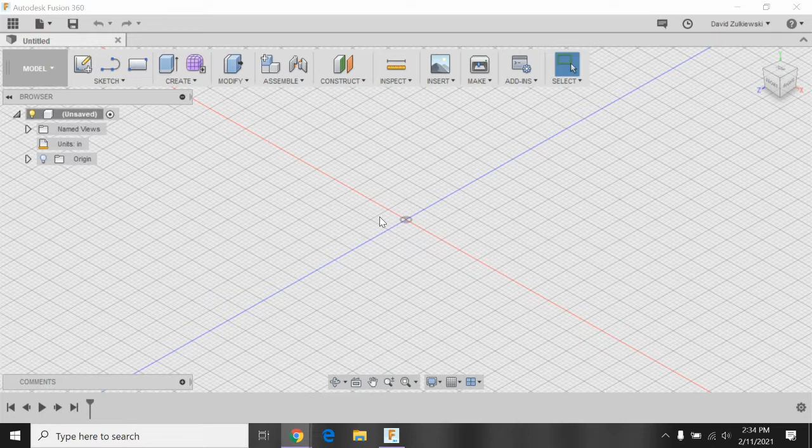We'll remember that. Okay, and we're just going to draw a simple rectangle that matches up with the dimensions. And so in order to create a sketch, I'll go up here to plus sketch. And we have 3 options, right? I'm going to be looking down at my part, so I'll select the blue-red plane or the top work plane here. I have my 0, 0 in the middle. We'd like to try to get our drawing to be as close to 0, 0 as possible.

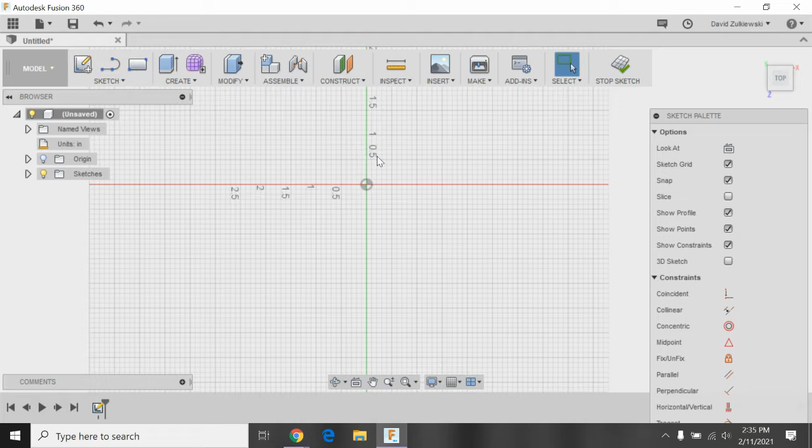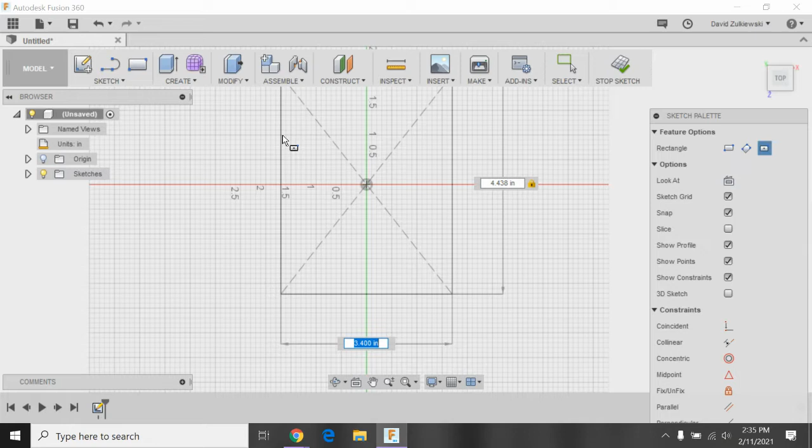So what I'm going to do is go to sketch, rectangle, and a center rectangle. I start to draw my part, and my drawing is 7.125. Actually, my height is 4.438. My tab, my length of my part is 7.125. All right, I'll zoom out here so I can see a little bit better.

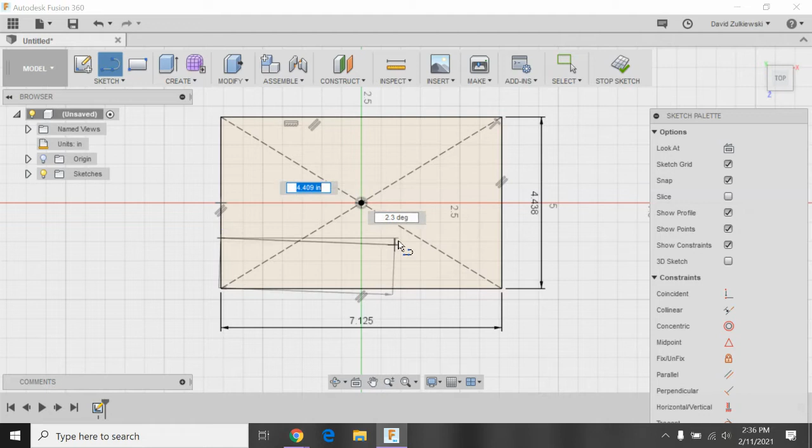And then I have the little L shape that I need to lop out this little rectangle here at the bottom. So I'll draw that shape. And I'm just going to be careful so I don't click on things like the midpoint or on anything along this dashed line. So I'll come out here somewhere, click. As I go across again, I'm going to try to not click on the green line or this diagonal line. I'll stay just a little bit away or a little bit past it, somewhere in there. And then I'll just go straight down. All right, so I have this little notch that I'm going to cut out.

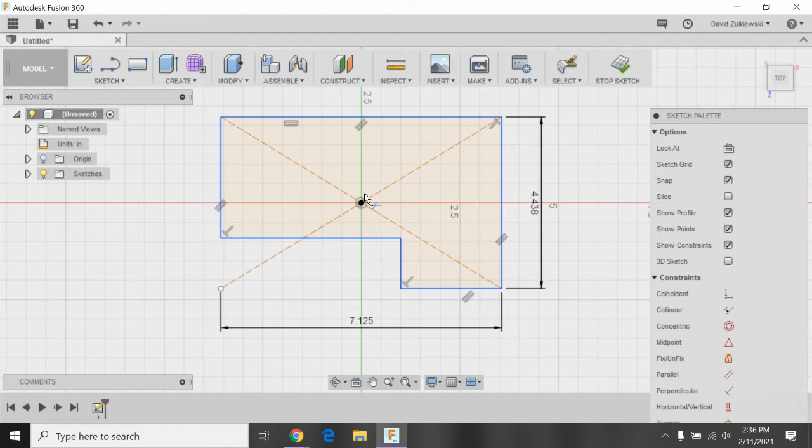And in order to get rid of these 2 lines here, I'm going to go up to sketch and go down to trim. And I'll hover over the line I want to get rid of and the second line I want to get rid of. Now this doesn't look exactly like my part, so I need to dimension this a little bit. And I'll go to sketch, sketch dimension. And we'll just look at our part and we'll see what dimensions we can use. And I see that they give me this dimension here, and it is 2.25.

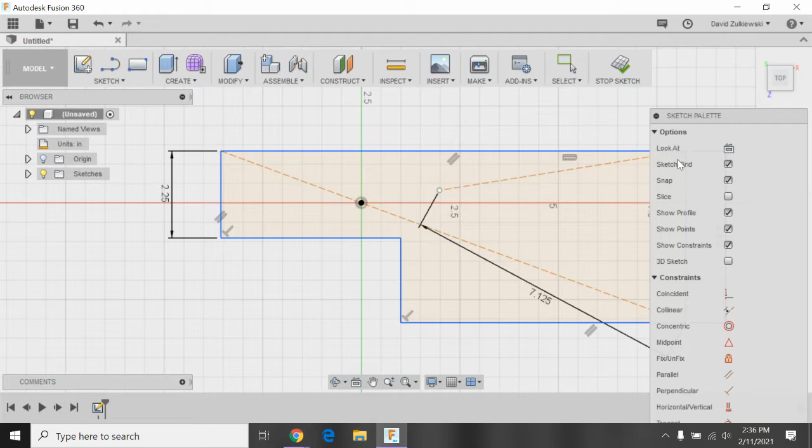All right, now that threw my drawing all over the place. Okay, so let's zoom out here, try to take a look at this. It got a little bit crazy because there's this dimension here based off this white dot. So we'll undo that. Let's try to take a look. That 7.125, see how it went to this lower point here?

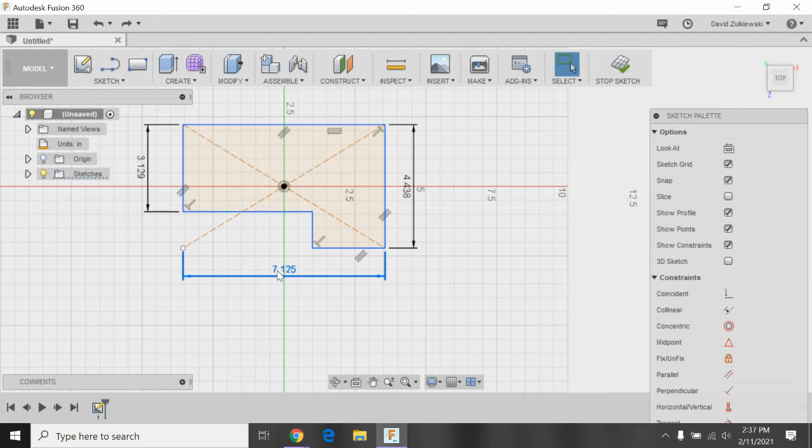Well, what I'm going to want to do is I'm going to delete that dimension for a second. And I'll go up here, I'll dimension this line instead. So sketch dimension. And I'll make that 7.125. Looks good. Hit enter. And now I should be able to go and double click on this and type in 2.25. There we go. So sometimes, depending on where our dimensions start and stop at, our drawing might get all crazy. So just got to be careful there because we had that reference point on here.

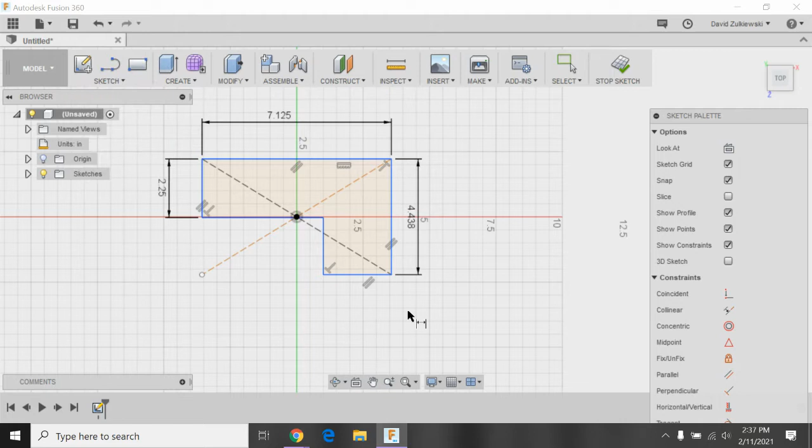The other dimension I have is this bottom piece here. I drag it down, and this is also 2.25. Okay, looks pretty good. Now we have 3 holes in our part, and there's actually 3 different ways to create a hole. So I'm going to do all 3 of those today for you, and you can pick the one that works best and go from there.

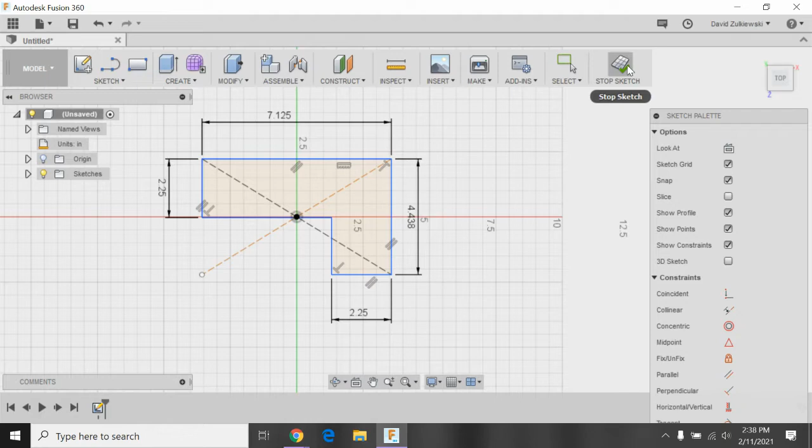All right, so let's stop sketch, and I'll hit the house button, and there's my 2-dimensional part. Well, we want to make this 3-dimensional, and the book did not provide us with a thickness, so we'll make it 1 inch thick. So let's go ahead and create. Click on my shape, and again, I can grab the arrow and drag up. I can type my number right here in this box, or there's also a dimension box over here. So ours is 1.00. Hit enter.

Now again, 3 good ways to add a hole. The first one is to put the hole in the original sketch. So in order to go back to that original sketch, go down to the bottom of your screen here. You see all these fast forward, rewind, and play buttons. And right next to that are the 2 things we've done. We created a sketch and we extruded. So I'll go to the sketch and I'll right click on the sketch. And it's not showing up as edit.

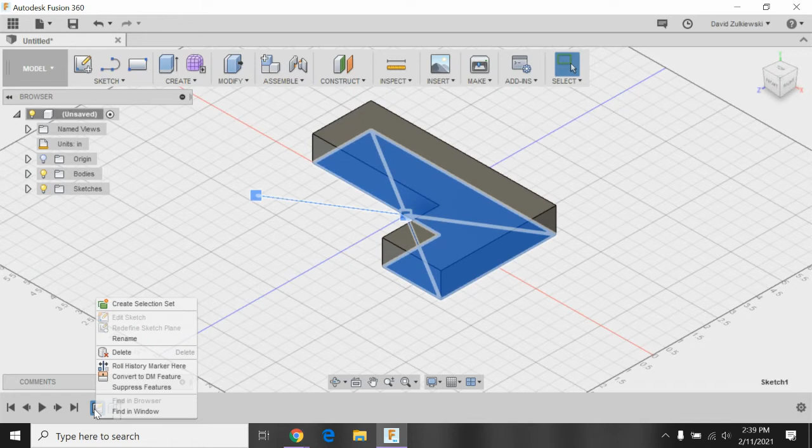So let's try that one more time. Hit the escape button. And there we go. Now there's edit sketch, and it takes me back to the original sketch. So I'll go ahead and put in one of the holes right now. So sketch, and it's a hole, so circle. I like center diameter circle, but there are several options.

So center diameter. Again, when I go to draw this, I just want to be careful. Don't draw it on the diagonal because we're going to want to put some dimensions in here. So I'll just come over here a little bit. Notice that dashed blue line? That's the midpoint. If I start at the top and work my way down, it actually snaps to the midpoint. If you don't like that, you might want to hover up just a little bit. Well, don't want that circle.

Let's try again. Sketch, circle, and just come out over here somewhere, maybe not touching that dashed blue or that dashed black line. And I'll just draw a little hole here right now. Now, how big is the hole? It's 0.625 diameter. And it does say on the computer here, specified diameter, so that's good, 0.625. And I'll hit enter. Kind of hard to see my dimension, so I'll grab the dimension and I can drag it up out of the way so I can see it.

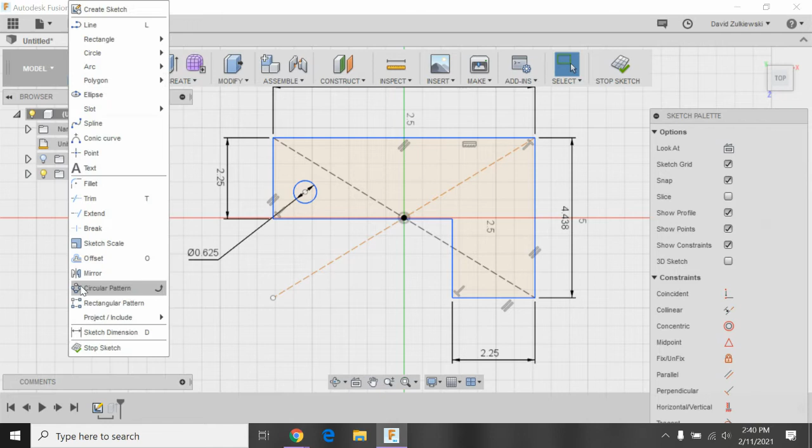Now, that's not where we want our circle to be placed. There's actually a couple other dimensions here that we need to use to place it. We need to locate our hole top to bottom and left to right. So I'll go up here to sketch, dimension. And the first thing I want to do is go from the top to the center of the circle. And you see we have a dimension here. The computer tells me it's 1.50217, but the book tells me it's 1.125. Okay, I'm going to enter. And that looks pretty good.

Now I also need to locate it left to right. If I look in my book, I'd really like to just go from this left edge to the center point, but the book doesn't give me that number. I'd have to do a little bit of math. So let's go from this far side to this center point and go up. Now I look at my book, and my book also doesn't give me one dimension to use here. It gives me two dimensions.

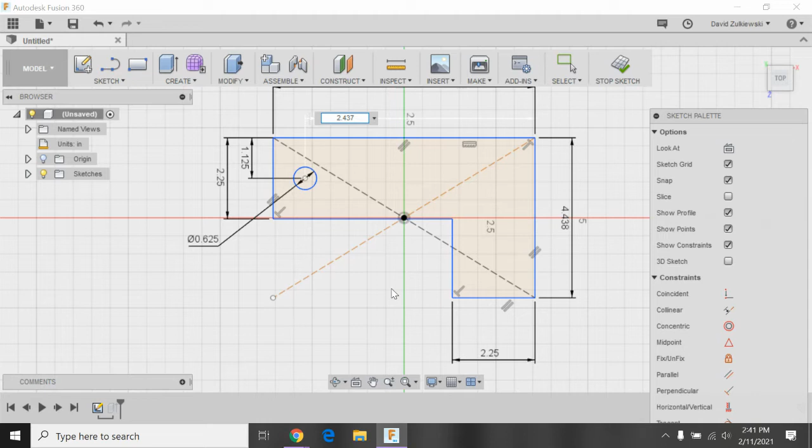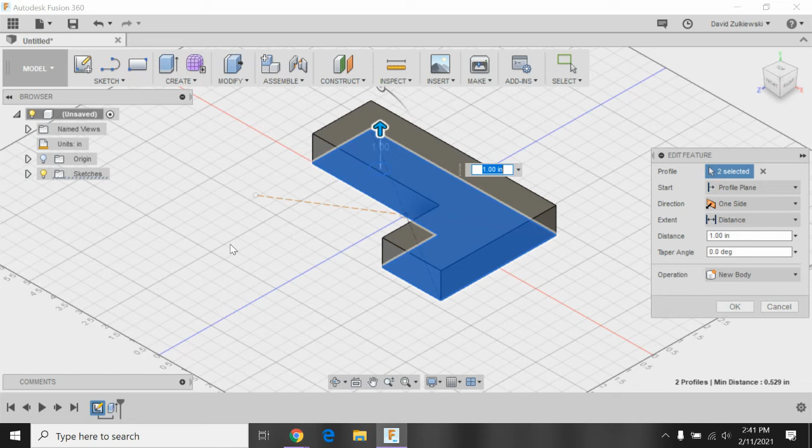So I could go to extrude down here in the bottom left, right click on the extrude. Again, I needed to get it highlighted, so say escape. Edit feature. And now I see the hole is there. If I click the hole once, notice that there's a little red circle around it. Now when I say okay, our hole is there, right? And I can grab the little block up here in the upper right-hand corner. I can see that there is definitely a hole there all the way through.

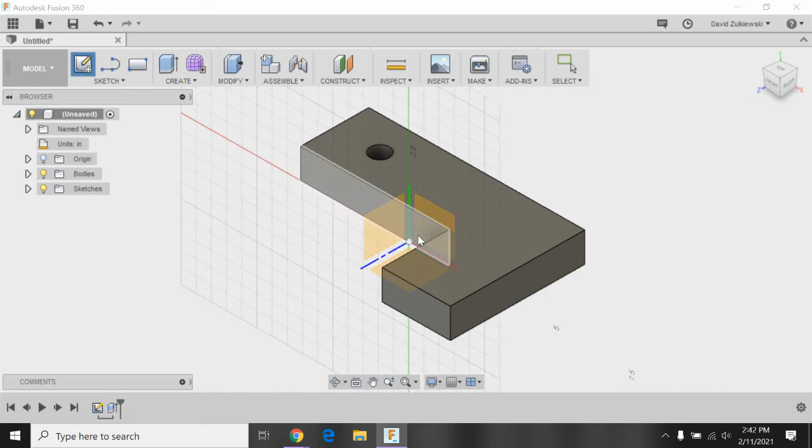All right, so that's method one. Maybe you like that, maybe you don't. Let's take a look at method two now. I have my part sitting here, and I can go over here to sketch, and I want to identify where to put the sketch. I could pick those orange work planes, but why not just select the top of this part? When I select the top of this part, it puts me into a sketch. Look up here in the upper right-hand corner, it says stop sketch. So I'm inside a sketch right now.

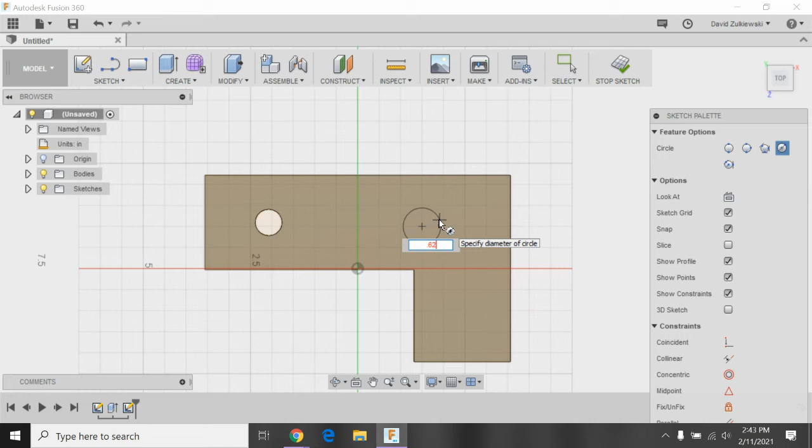I'll just go to sketch, circle, center diameter circle. I like that one the best. And I'll go over here and place another circle. How big's my diameter? Well, the book says all three circles are 0.625. And actually, hole would be the correct terminology, right? Again, I can't see the dimension real well, so I'll drag this up. And again, we need to locate this up and down and left to right.

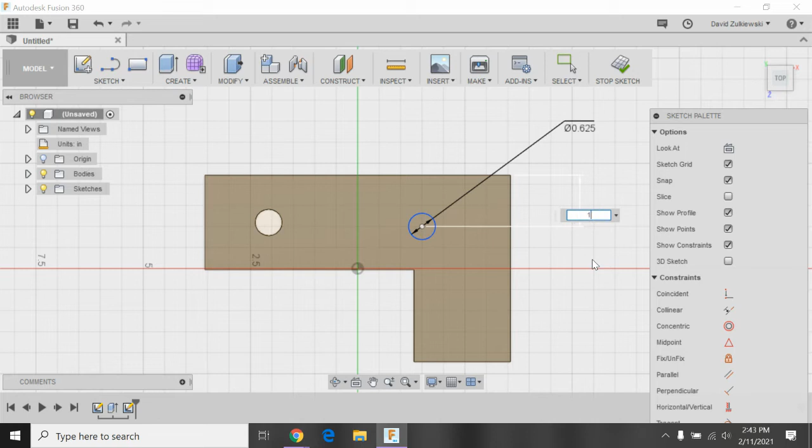So sketch dimension, from the top of the part to the center of the circle is 1.125. And then from the right edge to the center, I go up, and our example here says 2.437.

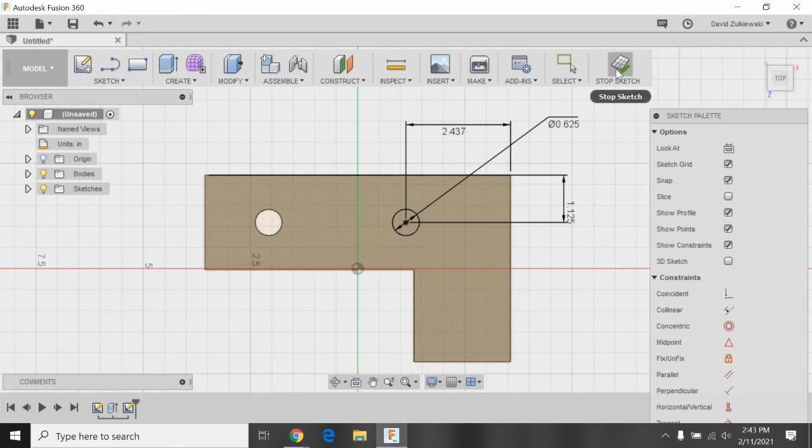Okay? And that's all I need for this sketch. So I can say stop sketch up here in the upper right-hand corner, stop sketch. Now the hole is sitting there, or actually now it's just a circle. Right now it is a circle, and we want to turn that into a hole.

So let's go up here to create. And again, different versions of Fusion, yours might look a little bit different, but just go find the extrude icon. Just hover over the icons till you find the one that works. Create. Click on that circle, and the arrow's pointing up. Well, do we want to go up? No, I want to make a hole that goes down.

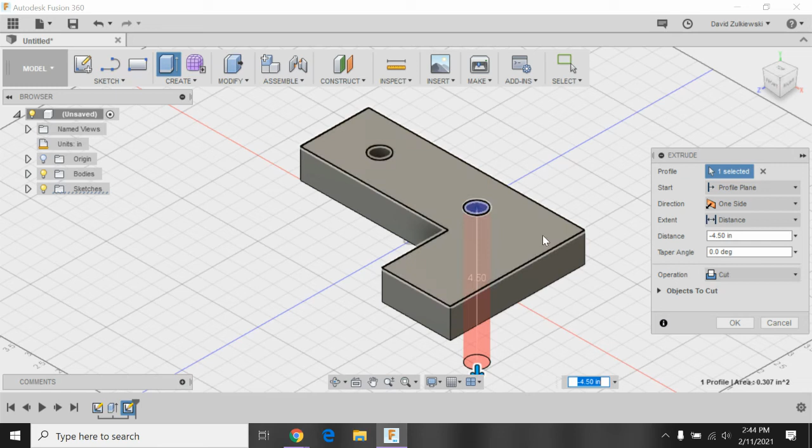And I can drag this into oblivion and just go to the very bottom. And notice it does turn red. If you look at the pop-up menu, notice that the operation is set to cut. It wants to cut a hole. Now, again, I could just drag it down and it would be okay. We want to be a little bit more accurate.

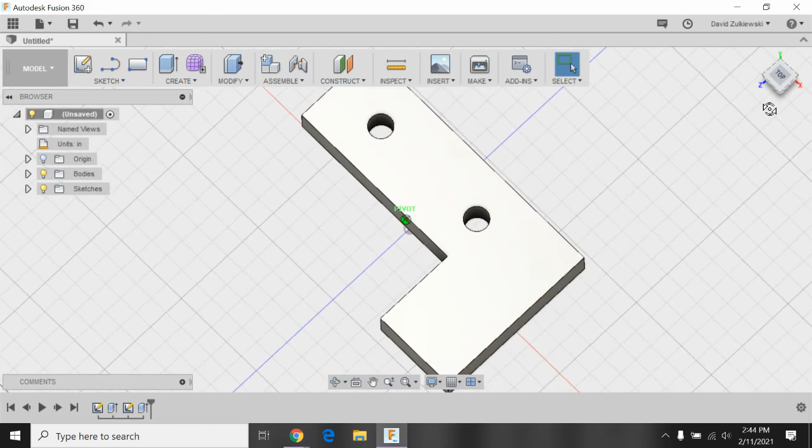So over here where it says extent, I can do distance and say all. And now it'll just cut through the thickness of the part. And you say, okay. Again, I can grab my little block here in the upper right-hand corner, and I can see that there are 2 holes drilled through. So that's the second method to make a hole.

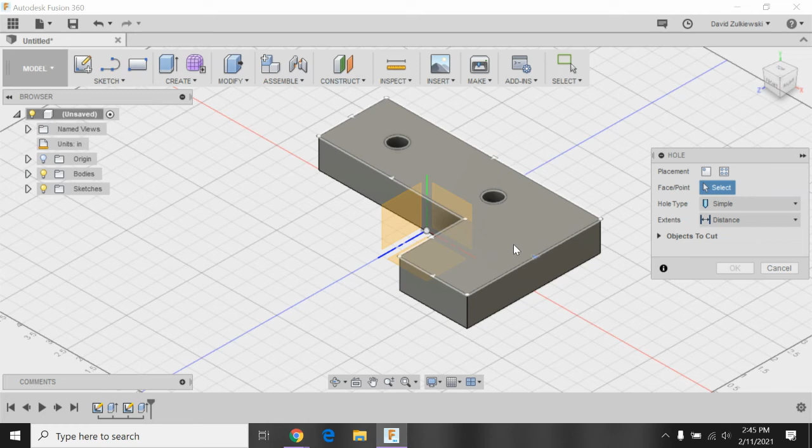The third method, under the Create menu, if I drag down here, I can see hole. And a little pop-up menu comes up and says, where do you want to put this? What face or what point do you want to put this on? Well, I want to put it on this top face. And I want to get pretty close to where it goes. This bottom hole is down here somewhere. Okay, so I'm going to get close to it. I'm going to click there.

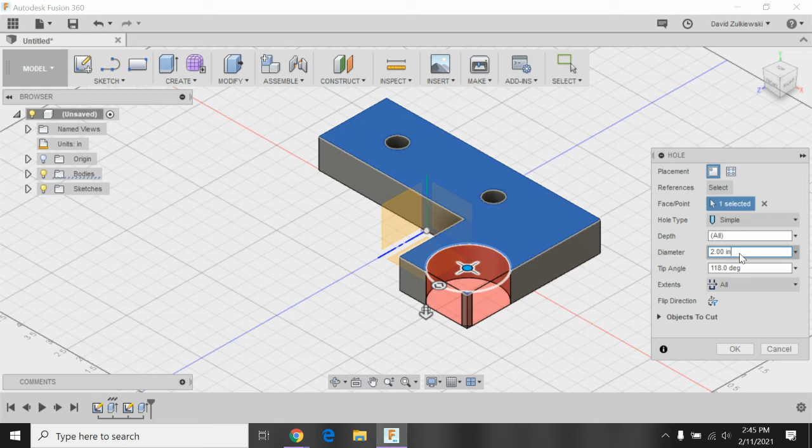And it gives me this gigantic circle. This huge hole is there. We'll come over to the pop-up menu. It says depth, diameter, tip angle, extent. So first thing, let's do all. And then diameter. It gives me a diameter of 2 inches. Well, my diameter is 0.625. Don't hit enter. Don't hit enter.

The next thing, though, this is not where I want it to go. Well, I need to create some references. Up here in my pop-up menu, notice it says references and select. And again, every version of Fusion is a little different. You're going to need to look around for references or locations, right? Look for the one you need. So right here is select.

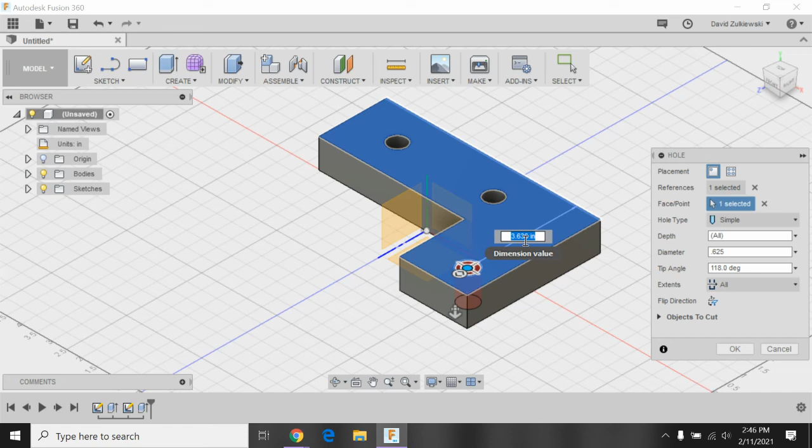Well, I want to reference it from the right side edge. And I also want to reference it from the top. So let's do the top first. So I do the top, and it gives me a dimension. Now the drawing that we have from our book, or the one that's on our course management page, it actually gives me 2 dimensions. So again, this is a time where I can say 1.125 plus 2.313 and hit enter. All right.

Now I'm not quite done. So if you did do enter, all right, we still need to locate left to right. So be careful. I want to select my right edge now. So I click on that and notice that a dimension pops up. Now my course management example, or in our textbook, if you go find it, it actually doesn't give us a number. It just gives us that the thickness of this is 2.25.

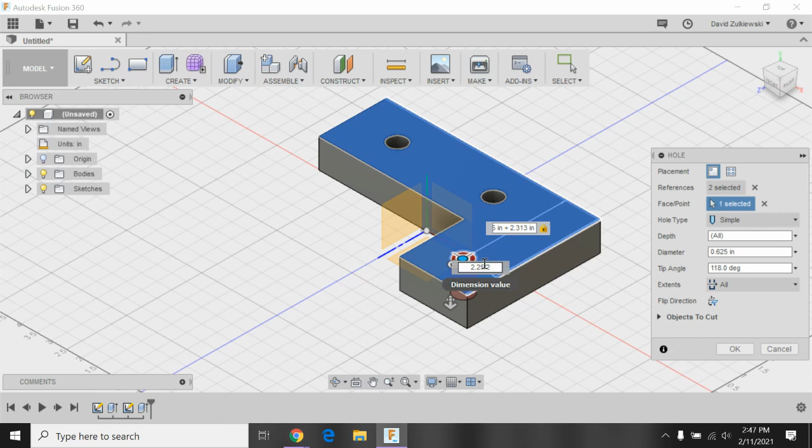So what I'm going to assume, 2.25, and we all know assuming is not the best thing for you and I, but 2.25 divided by 2. Let's put it halfway in the middle. We're going to just assume it goes in the middle. And now we'll say okay. And I have my third hole. I can rotate the box around a little bit. I can see that all 3 holes are drilled through. I'll click the home button just to be safe.

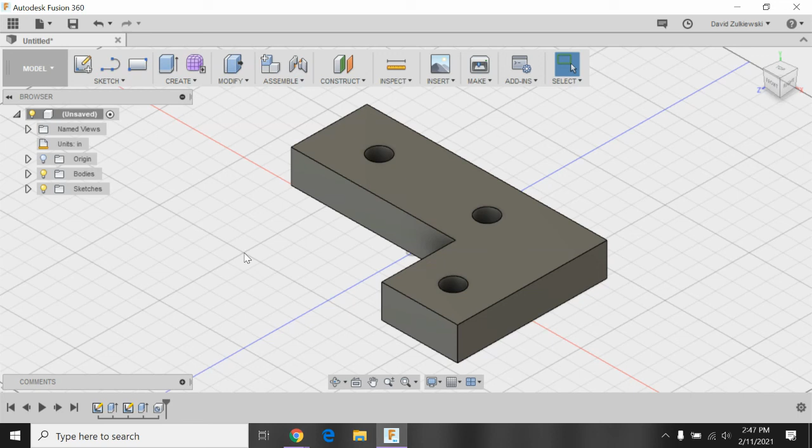Now, part of my drawing's cut off here if you're looking at my example. So what I'll do is I'll zoom out just a bit, zoom back in just a bit, make sure that drawing's nicely framed up. And now I'm ready to go ahead, and for our assignment today, we're just asking you to take a screenshot. So either print screen, or depending on the laptop you have, you might have an ability to use a snipping tool. Whatever works best, you're just going to grab a screenshot and upload that for our drawing. And that's all we have today for Figure 385.